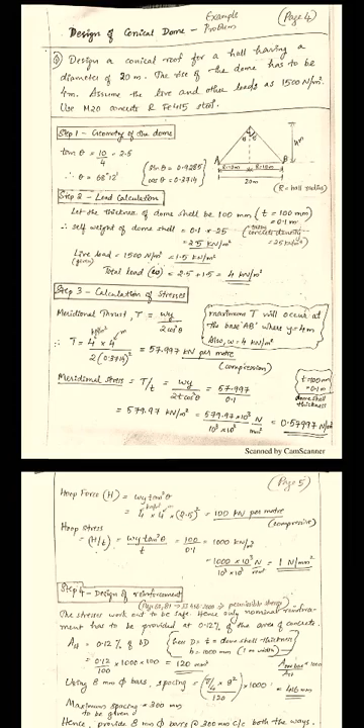Here is an example for the design of a conical dome. We have to design a conical roof. There is a hall having a diameter of 20 meter and the rise of the dome has to be 4 meter. We may assume live and other loads as 1500 Newton per meter square. Using M20 concrete and Fe415 steel, we have to design a dome for this room as a roof.

So what are the steps in the design? We have to find out what should be the basic geometry of the dome based on the requirements given in question, and also we have to calculate the load coming over that due to the weight of the structure and also due to the live load. Then we have to see what are the stresses coming due to that particular load, and in domes we have two types of stresses, meridional stress and hoop stress.

These two stresses we have to find, and after that we have to design the reinforcement in order to take all these stresses along the latitude and also along the meridian. What should be the reinforcement to be given in those directions? And after that we have to see whether we have to give a ring beam. So in most cases we may need a ring beam. It is not provided in the case of a hemispherical type of dome. It is not necessary, so not in all the cases we may have to give a ring beam.

So we have to design a ring beam. We have to find the size of the ring beam and also how much reinforcement should be given in the ring beam, and after that we may show the detailing of the particular dome. Okay, so these are the steps in the design. So we shall see from step 1, geometry of the dome.

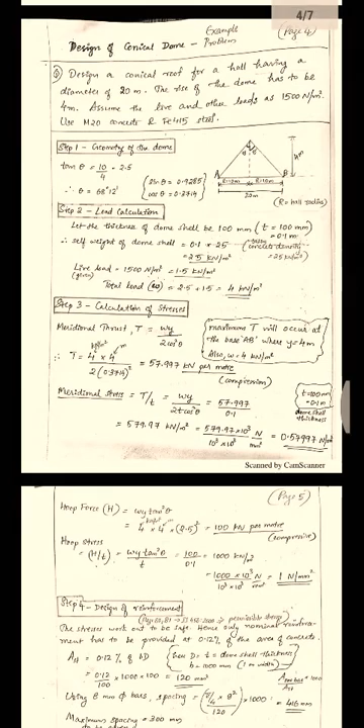So in this conical roof, the theta value is marked as shown in figure. So we can find out tan theta. The inner diameter of the hall is given, it is 20 meters, and so the radius value will be 10 meter. And if you find tan theta, it will be 10 divided by 4, where 4 is the rise of the dome, that is, how much is the roof height at the centermost point or the crown of the dome.

So tan theta is equal to 2.5. So theta value is 68 degree 12 minutes. And for convenience, I just found sin theta and cos theta values. That's all. So r is the hall radius, and that is here 10 meter. And the rise is 4 meter.

Now what are the loads coming on this? Based on this particular size, what is the load? We shall assume. To start with we need some load, and load comes from the structural weight also. So we have to assume a particular size and we will check whether it is safe. Then if it is okay, we'll go with that design. Okay, so that is the first step.

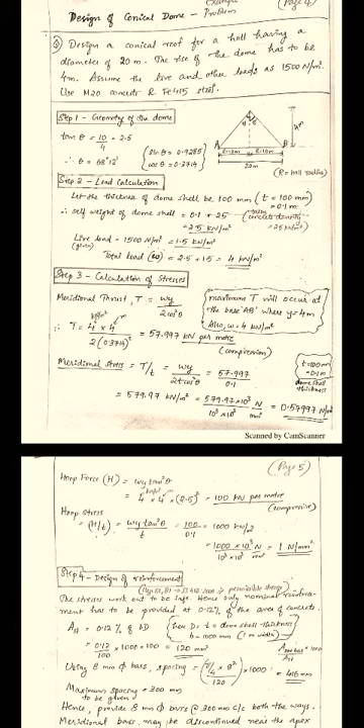Here we have to assume the thickness of dome shell, and here we are assuming it as 100 mm, that is 0.1 meters. So that value is designated as small letter t, thickness of the dome shell. Let t be 100 mm. So this is the step with which we start the design. So if it has a thickness of 100 mm, what will be the self weight of dome shell? We can assume the density of RCC as 25 kilonewton per meter cube. So density into the thickness will give you the self weight in kilonewton per meter square.

So 0.1 is the thickness in meters, and 0.1 into the density 25 kilonewton per meter cube will give you 2.5 kilonewton per meter square as self weight. So over an area of 1 meter square, it has a weight of 2.5 kilonewton. So that is the sense. Then live load, it is given. Again, the unit has some difference. It is 1500 Newton per meter square. So if you convert it into kilonewton, it is 1.5 kilonewton per meter square. And the total load W is equal to the sum of these two, that is 4 kilonewton per meter square.

So this is going as per the working stress design, and we are finding the stresses and doing the design for the working load. So we are not multiplying it with any load factor 1.5. We are taking the working load itself. So the load W is 4 kilonewton per meter square. Now we shall find out the stresses, meridional thrust T value. We need to get only the meridional stress and hoop stress, but there may be marks distributed for the steps finding the force also.

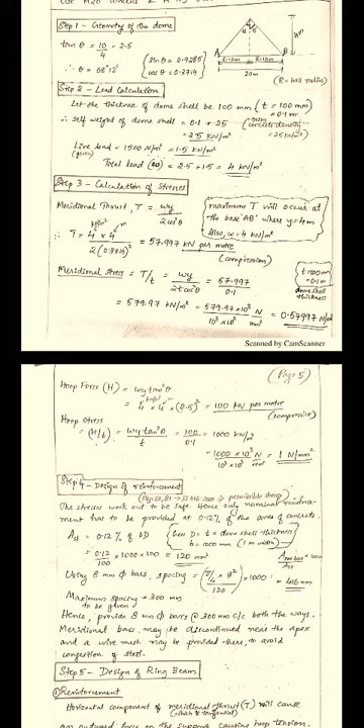Then what is the meridional stress? Meridional stress is capital T divided by small t. Small t is dome shell thickness. So 57.997 divided by 0.1. So you will get the answer in kilonewton per meter square. Now you can convert it into Newton per mm square. To convert it into Newton, you have to multiply with 10 raised to 3 in the numerator. And to change it to per mm square, you have to multiply with 10 raised to 6 in the denominator. So in effect, it will be 0.5799 Newton per mm square.

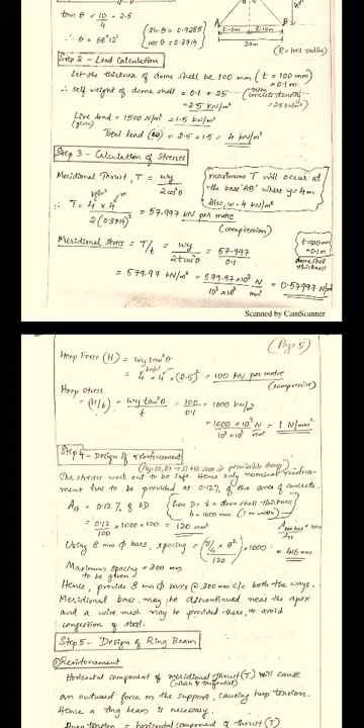Now, what is the hoop force? Hoop force equation, H is equal to Wy tan square theta. Then, substituting, you will get it is 100 kilonewton per meter. Then, what is the hoop stress value? It is H divided by t. So, if you divide it by 0.1, you will get 1000 kilonewton per meter square. Now convert it into Newton per mm square unit. So the value is 1 Newton per mm square.

Now we have to design the reinforcement in order to take all these stresses. The values of permissible stresses are given in page 80 and 81 of IS 456-2000. You can refer that. So if you compare this 0.57 Newton per mm square and 1 Newton per mm square, which you got as the meridional stress and hoop stress, these stresses are very low compared to the permissible values. So the stresses work out to be safe. So we may not give any extra reinforcement. Hence only the nominal reinforcement has to be provided, and the nominal reinforcement is the minimum reinforcement. That is, for Fe415 it is 0.12% of the area of concrete.

So what is the Ast to be given? 0.12% of BD, where B and D will be different here. B is 1 meter strip, so we can take B as 1000 mm and D is the depth, that is the total dome shell thickness. So here D value is the value of t. So 0.12 divided by 100 into 1000 into 100. Here D is equal to t, which is equal to 100 mm and B is 1000 mm. So the value of Ast is 120 mm square.

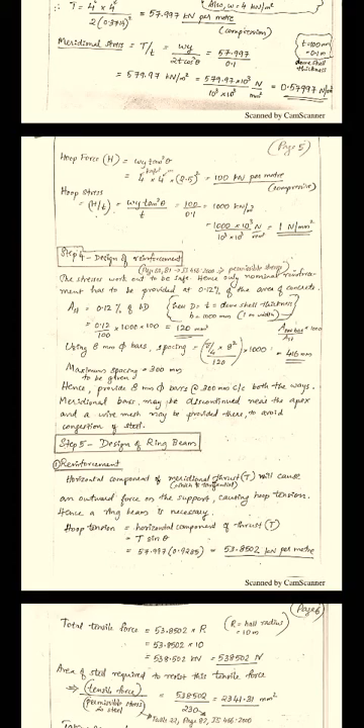So the next step is about the ring beam design. I hope you have read the theory part. So ring beam is provided where there is a horizontal force exerted at the base of the dome, the horizontal component of thrust. The meridional thrust is tangential to that dome surface, and if the meridional thrust is inclined, then we'll have a horizontal and vertical component. The vertical component of that meridional thrust will be taken by the supporting walls, but the horizontal component will be left unattended.

So we may have to give a beam in order to take this horizontal component of meridional thrust. So the thrust is always tangential. So okay, I hope it is clear. So this horizontal component will be causing an outward force on the support. So it will be causing a hoop tension at the support, at the base of the dome. So we may need to give a ring beam.

So how much is the hoop tension? How much is the force acting due to this horizontal component? So that is T sine theta, and the value is 53.85 kilonewton per meter. So what is the total tensile force? You have to multiply it with the hall radius. So you will get it in kilonewton, and that is converted later into Newton. So 538,502 Newton. That much is the total tensile force coming, which is to be taken care of by the ring beam.

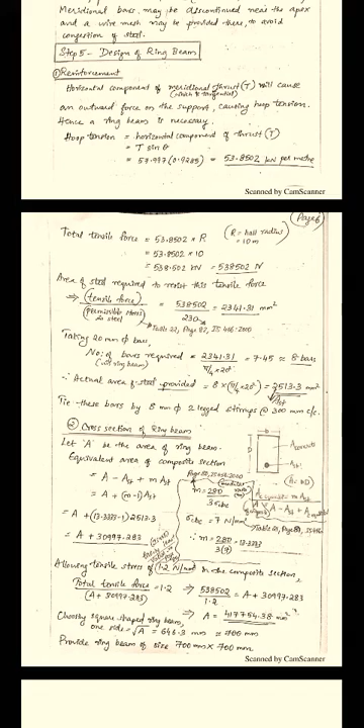So how much area of steel should be provided inside the ring beam in order to take this tensile force? We should consider how much is the permissible stress in steel, and later we have to divide. We may use this concept, force by stress is equal to area. If you divide the tensile force by the permissible stress in steel, you will get how much area of steel is required in order to take this tensile force. So that is done here.

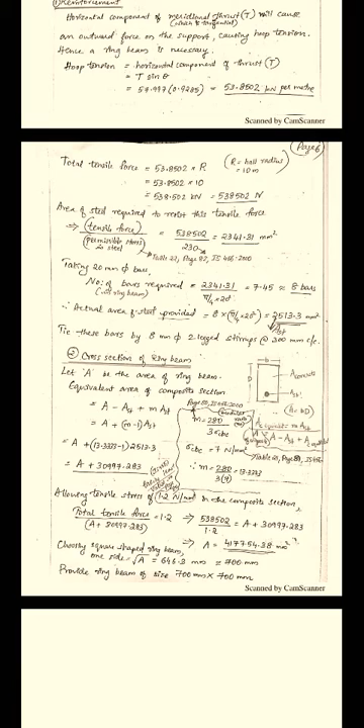So tensile force is 538,502 Newton, and how much is the permissible stress? You can take it from table 22 of IS 456 2000, page 82. So we are taking it as 230. So you can remember all these values; at the time of exam you may not get enough time to turn over the pages and find this value. So you can remember all these small values. And the area of steel required is around 2341 mm square.

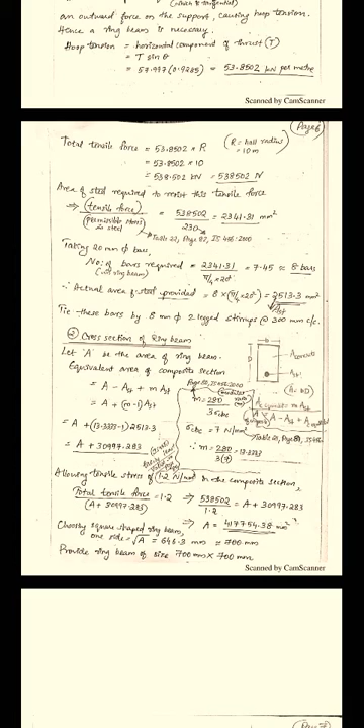So if we are taking 20 mm dia bars, how many bars are required? So this is a ring beam. We are going to fix the beam size. So we are not finding the spacing, we are finding the number of bars, because the cross sectional size of the beam we are going to fix. So you can find the number of bars by dividing the total AST required by the cross-sectional area of 1 bar if you are choosing 20 mm dia bars.

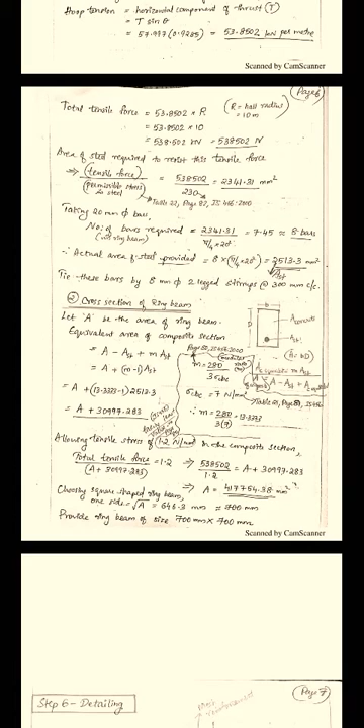So 2341.31, that is the area of steel required, divided by area of 1 bar, pi by 4 into 20 square. So you will get around 8 bars needed in order to take all these tensile forces. The actual fraction is 7.45, we are taking it as 8 bars. So the actual area of steel provided is 8 into pi by 4 into 20 square, that is AST 2513 mm square. And you can use 8 mm dia 2-leg stirrups at 300 mm center to center in order to tie these bars. So all these steps you can write as such.

Then how much cross sectional area of the ring beam is needed? So let A be the area of the ring beam, and if you consider the figure, we are going to give some AST inside the area of ring beam. So what is the principle used to find the total area? Total tensile force divided by area will give you some tensile stress. We are assuming a composite section, that means concrete plus steel, and in the composite section we are allowing a tensile stress of 1.2 Newton per mm square.

Then we know how much force is coming. So how much area of the composite section should be present in order to take this force? That is the basic concept. So total tensile force divided by area is equal to 1.2 Newton per mm square. That is how we are going to find the area. Now, if you are considering a composite section, how can you write the area? If you write area as B into D, that B into D includes the area of steel also. So if you want to equate something, all the things present over that area should be of the same type.

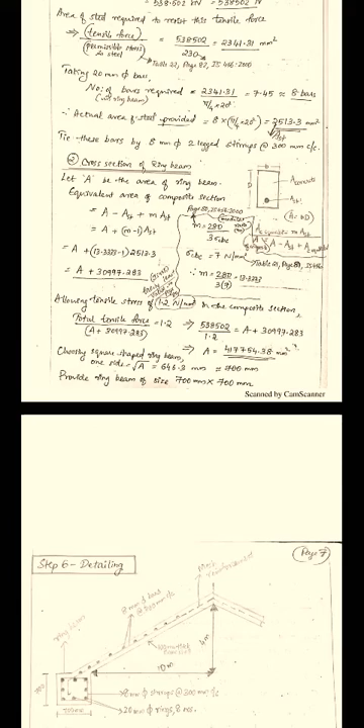So we have to convert that area of steel into an equivalent area of concrete. So that is written here. How much is the equivalent area of composite section in terms of concrete? That is total area A minus area of steel plus the equivalent area of concrete. We are deducting area of steel from the total area. Okay, now AST is gone. Now there is a hole inside, isn't it? Area of steel is not considered.

Then we have to replace that same AST with an equal amount of concrete in order to understand how much is the total equivalent area of the composite section. So A minus AST will give you the total concrete area. Now we are going to replace this AST by some amount of concrete. So how much area of concrete is required, which can be equal to this AST that we have removed? So that is equal to M into AST.

All these are coming in the working stress method of design. So M is the modular ratio. So an area of steel AST is equivalent to M into AST concrete. If you are having AST, if you are going to replace it with some concrete, you should place M times AST of concrete. Okay, so that is the concept. So capital A minus AST plus M into AST is the equivalent area of composite section.

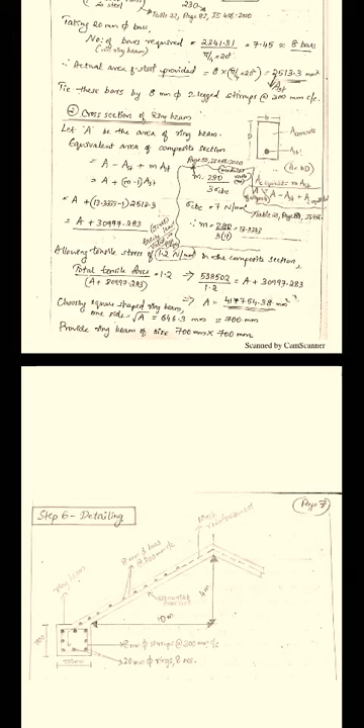So this working stress method was used earlier. It was an earlier method. So this may not be familiar to all of you because it is not there in your syllabus. But we are doing all this type of design with this working stress method. So sigma CBC value you can take, and what is M value, and substitute in the equation. So you'll get A plus 30997.283. That is the total area, equivalent area of concrete.

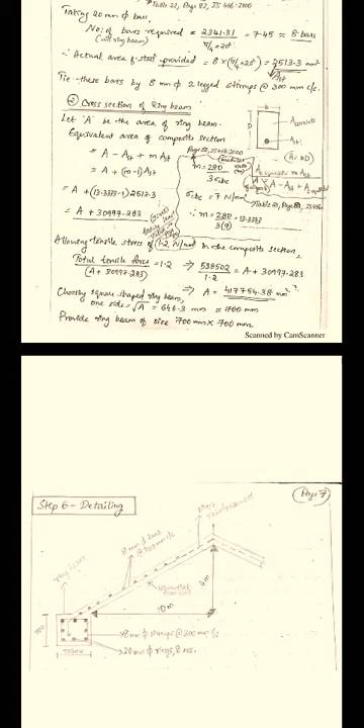Now substitute in the equation below. Total tensile force, how much is that? 538502 divided by the stress value that we are allowing, tensile stress 1.2. Okay, so you can refer IS 456 for all these values, which is equal to the total area. So from there you will get what is the total cross-sectional area. By equating all this, you can solve it and find what is the A required. A is 417754 mm square.

That is B into D, which is equal to 417754.38 mm square. Now if you are choosing a square shaped ring beam, A is found. So how much should be one side? Root of A, approximately 646 mm. So you can round it off to a higher value. You are giving a higher value for the ring beam dimension. So you are choosing 700 mm. So provide ring beam of size 700 by 700 mm.

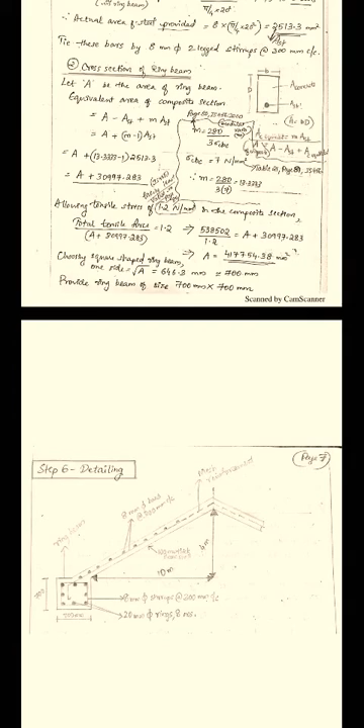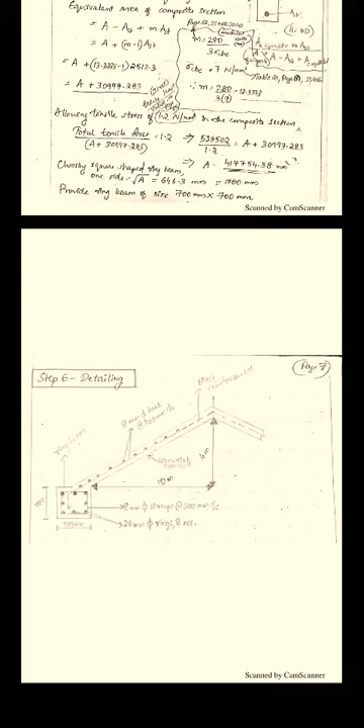Now we can refer the detailing. In the detailing, the ring beam is shown at the bottom of the dome. So only half of the section is shown. That is enough. It is continuous. It's the same on the other side also. So there are the bars, 8 mm dia at 300 mm center to center. That is given in both directions, along the latitude and also along the meridian. And the ring beam is shown. There are 8 bars in the ring beam which are held by the stirrups, which are 8 mm dia again.

So the ring beam is having 20 mm dia bars. It is called a beam, but if you are looking from the top, it is like a ring, like a finger ring. The shape is circular. So that is why it is called ring beam, and there are 8 bars. So all these bars are given again as rings. So that is why it is shown 20 mm dia rings. And the dimension 700 by 700 is shown, and at the top you have to give mesh reinforcement.

So in an exam point of view, this is enough. So the basic steps are the same. You may not get enough time to refer the pages of IS 456, so you can remember all these smaller values, the standard values that we have taken in this design, and then do the design.